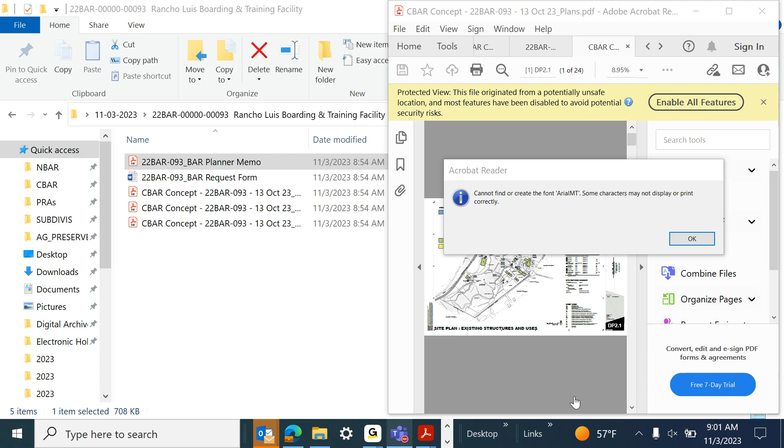People think we don't have a sense of humor. We're trying.

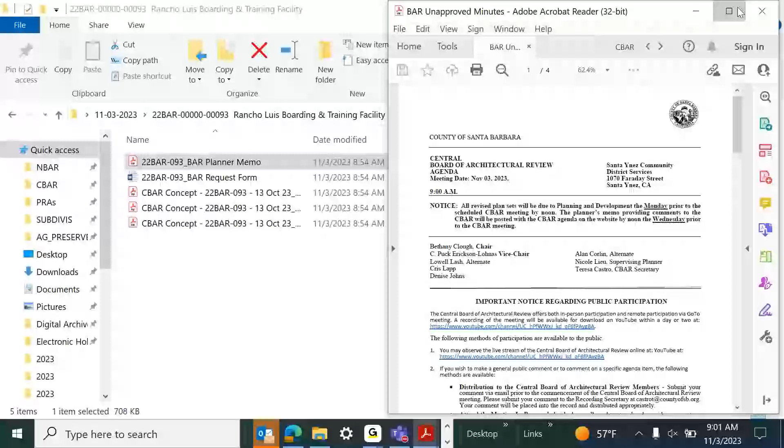Okay, I'm going to call the Central Board of Architectural Review November 3rd hearing to order. Are there any members of the public who wish to address the board regarding an item that is not on today's agenda?

We're not seeing anybody in the public. If you are online and wish to speak on this item, please raise your hand. Not seeing anybody raising their hand, we have no public comment.

Okay, agenda status report. We have no changes to the agenda.

Okay, I'd like a motion to approve the minutes. Second. Is there any further discussion? Does anybody have anything? No. Okay, all in favor? Aye. Abstaining. Okay.

CBAR informational briefings, anybody have anything? Did everybody get the memo from P&D about working on improvements to the process?

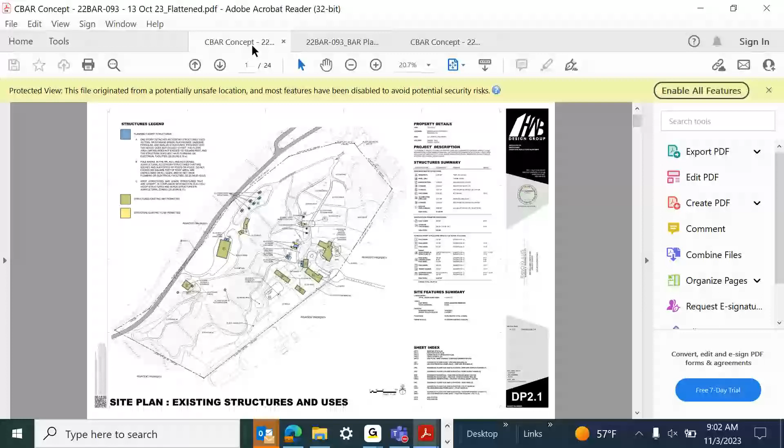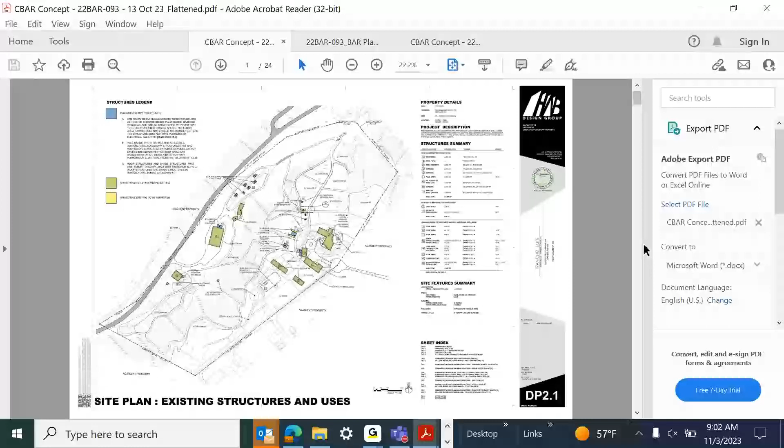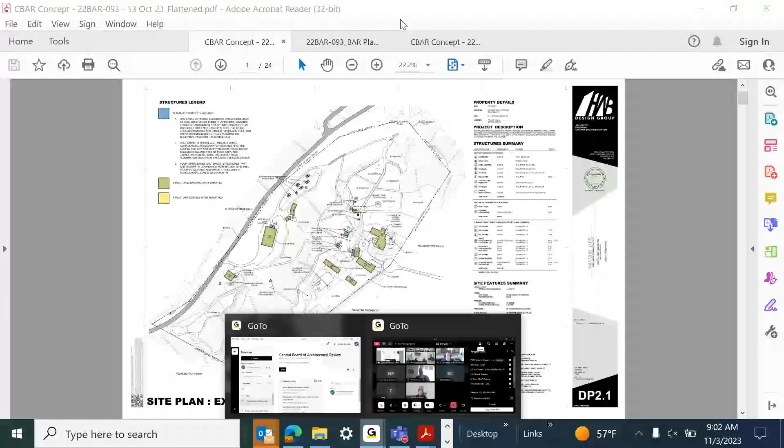Which process? The general planning process. No, I don't think I got that one. I think it would be forwarded to all of you, and it would be good to include input from CBAR members in terms of our perspective on what things might be streamlined or improved. What document did you get, or email? It was in response to the number of complaints lodged recently about how lengthy or difficult the permitting process has become.

Yeah, I didn't get it. I don't think I got it either. That's probably because I've been squeaky, but that's why I'm bringing it up, because it is very pertinent to all members. Whoever sent it to you, ask them to send it to all of us, and put it on the agenda if you want. Yeah, that'd be great. Anything else?

Okay, member recusals, do we have any for today? No.

Nicole, do you have a staff update? Yes, I have a few items for you, some of which I mentioned before. Coming up on November 7th, next week at the Board of Supervisors, they're going to be looking at some updates to accessory dwelling unit regulations in our ordinances, so that might be of interest. That's to bring it more into conformance with changes in state law.

And then on November 8th at the County Planning Commission, there'll be a housing element update. And then on November 29th at the Planning Commission, there'll be a hearing to hear the agricultural enterprise ordinance. And that's all I have.

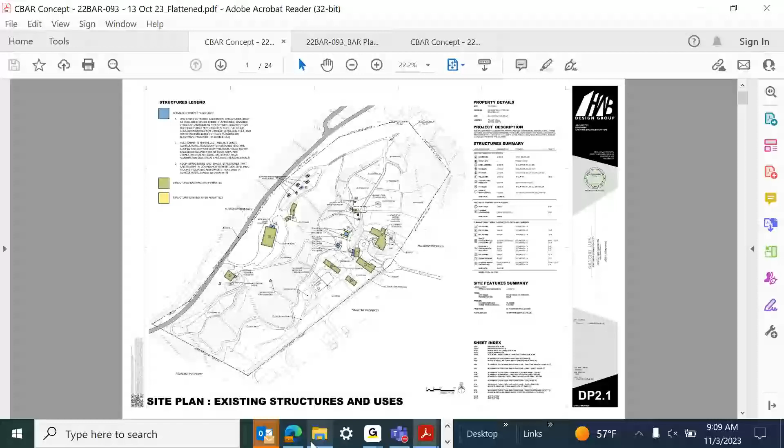First I'd like to pull up that response memo on the screen. I think it's the tab that has no name — yeah, there you go, planner memo, that one.

Hey, to interlude, this is Jax — this planner memo is different, just reflecting your response document. If you want to pull up the actual response document, Teresa, if you extend out the title text, it will say CBAR XYZ response at the very end. It's one of the PDFs. Yeah, there we go. There you go. Thanks, Jacqueline.

All right, so introduction here, like I talked about, and hopefully you guys had a chance to review this memo. I went item by item pointing through the plans, but I'll take you through this today.

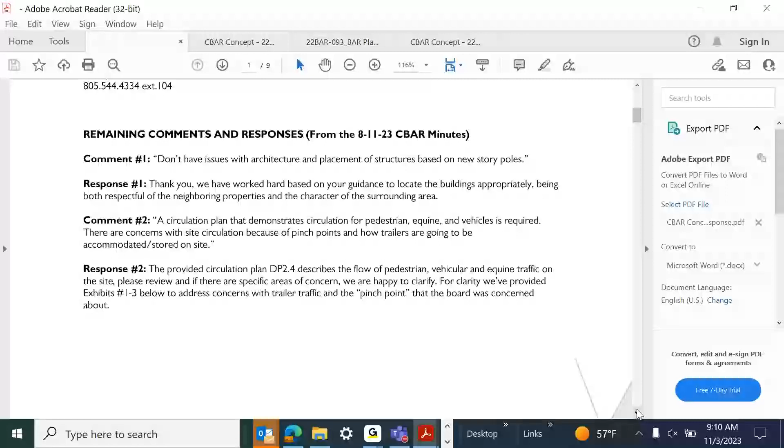If you scroll down to where you can see the first comment on the screen — there we go. Comment 1: not having an issue with architecture, placement of structures based on new story poles. Thank you guys for your effort collaborating with staff and the neighbors to make this project better through this process so far.

The second comment: circulation plan that demonstrates circulation for pedestrian, equine, and vehicles is required. It concerns the site circulation because of pinch points and how the trailers are going to be accommodated on site. So if you can now pull up the plans and go to DP 2.4. Once you've got that on screen.

Since our last meeting, we put effort into updating this plan to clarify how different types of circulation interact with the site, whether it's vehicles with trailers, the Kubota utility vehicles, horses, or boarders. If you're unfamiliar with the Kubota utility vehicle, imagine a 4-wheel-drive hardcore off-road golf cart — that's what we're looking at there.

Those are those guys. We've added a color coding overlay, so the hatch patterns in the cloud on the left side are color coded to show existing trails and paths suitable for riding horses or the utility vehicles. There are also existing vehicular roads on the site shown in the middle hatch color, and the proposed new driveway in darker gray on the south border of the site, extending down to the vineyard storage building at the southwest corner of the site.

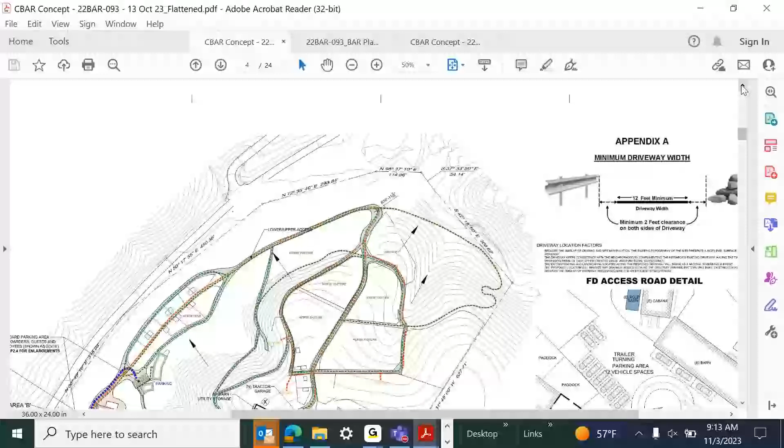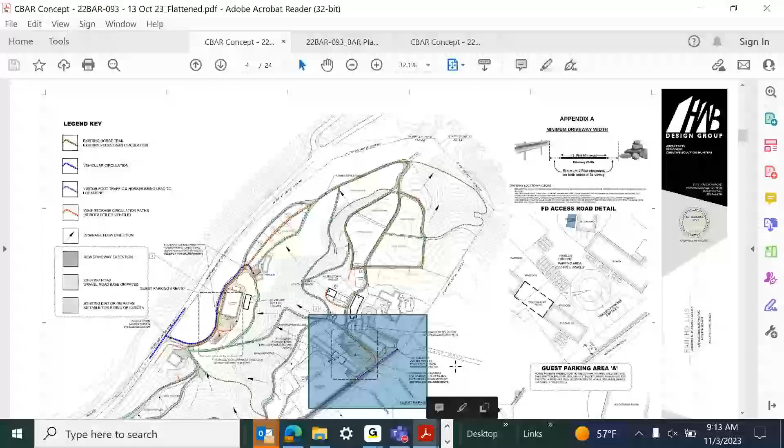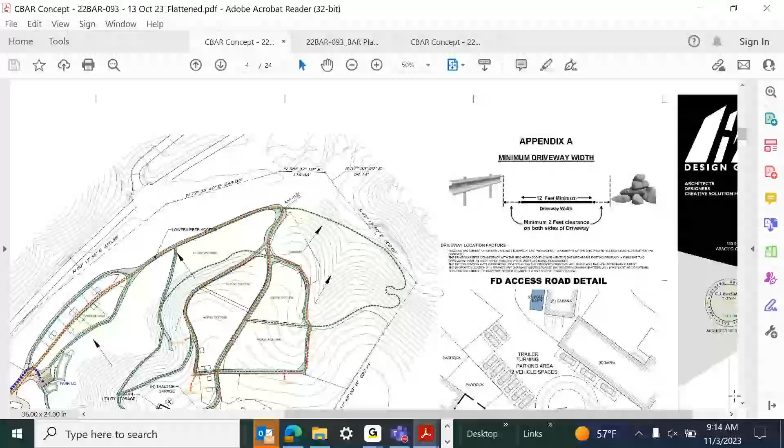In these 3 locations, starting with guest parking area A, keyed on the overall plan. It's the first entry point off the cul-de-sac on the southeast side. Let's zoom into that guest parking area A, the enlarged exhibit on the right side of the plan. There's B to the right, and A above and to the right - that one where your cursor is now.

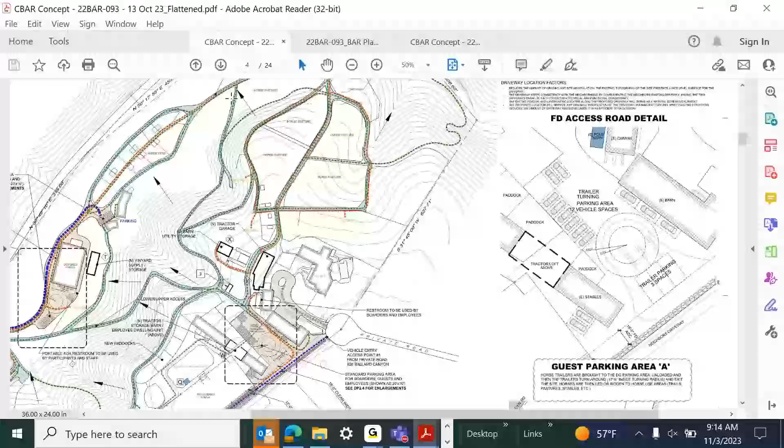So if you guys can see this clearly, I can explain. This is where boarding horses will park vehicles and trailers. They'll lead their horses by foot between the paddocks to the west, and under that tractor storage loft there's a walk-through beneath the loft over to the arena, down to pastures and trailheads to the southwest, or to the northwest there's also pastures and riding trails, up past the existing cabana.

We're showing clearly that a trailer can fully do a turnaround there without even doing a 3-point turn, which is nice - trailers can back in. We're anticipating up to 3 trailers parked in some spaces, positioned away from the property line past the proposed tree line, so those will be nicely screened from the neighbors. There's also standard vehicle parking for boarders to park their trucks. Past this point, trailers won't be circulating down the road on the site - this is where they'll stick to this area.

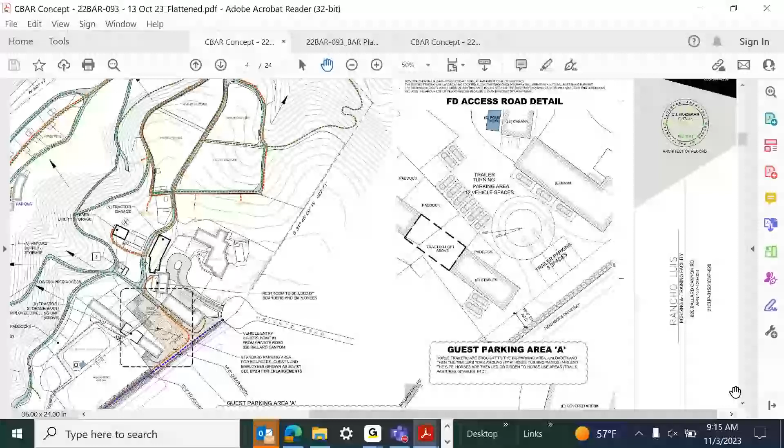Moving on to guest parking area B, just below this exhibit, on the lower part of the ranch by the existing covered arena, directly accessed off Ballard Canyon Road. We're also showing sufficient sizing for a trailer turning area. Horses here would be dropped off from their trailers at those locations and be either led or ridden to the northeast to the pastures, the existing covered arena, or trails on the site. There are vehicle parking spaces as well shown there, demonstrated with the functional geometry.

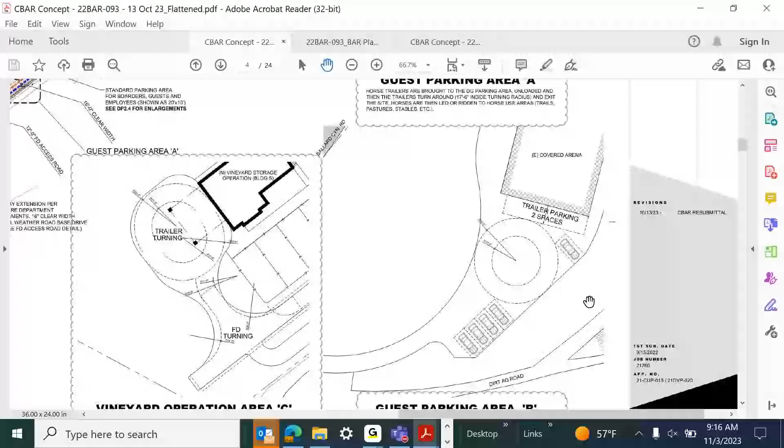Now on to Vineyard Operations Area C, the last exhibit. We put this here because there's a couple of functional areas we wanted to point out. We don't anticipate horses or trailers in this area because boarders will be dropping horses off at parking area A. We're showing functional geometry in case a wayward trailer ends up down here and needs to turn around - they can turn around and go under the overhang.

I'm getting a lot of feedback. Yeah, we understand what you're talking about, we've looked at these plans. If you could speed up, it'd be helpful. Well, I just want to make sure we're being thorough for y'all. Yep, appreciate it.

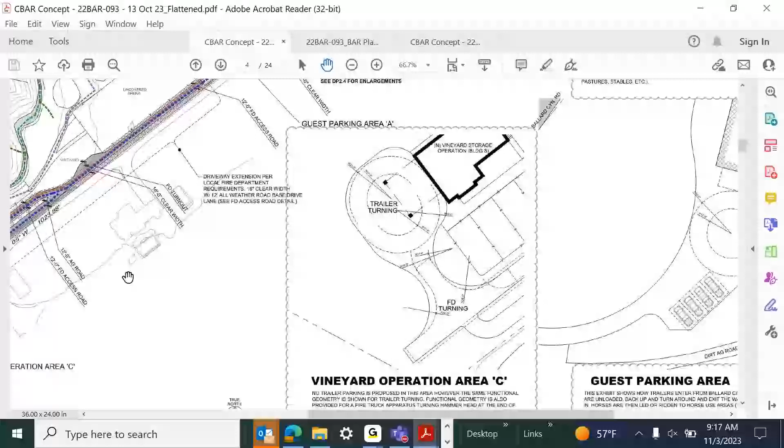So we don't anticipate horses or trailers down there because boarders will be dropping their horses off in guest area A. We've shown functional geometry in this location in case the trailer ends up here. The building will be served primarily by those Kubota utility vehicles, but you'll also notice in that enlarged plan there's functional geometry for the fire department turnaround, per county standards.

Again, I know there's a lot of information. Please hold questions so I can address those after public comment. I want to make sure we understand this exhibit.

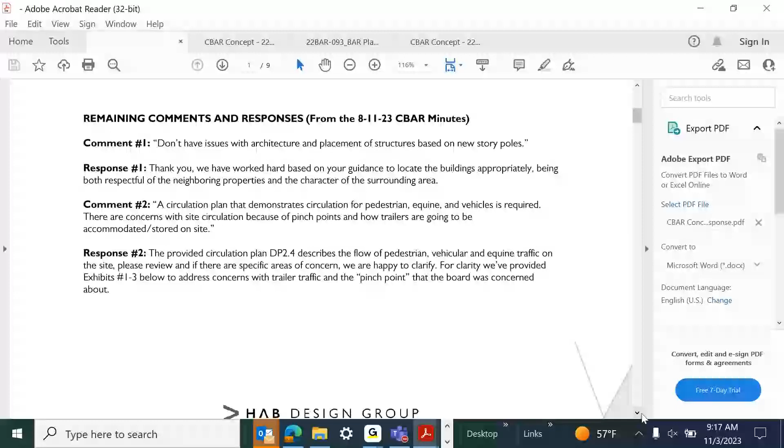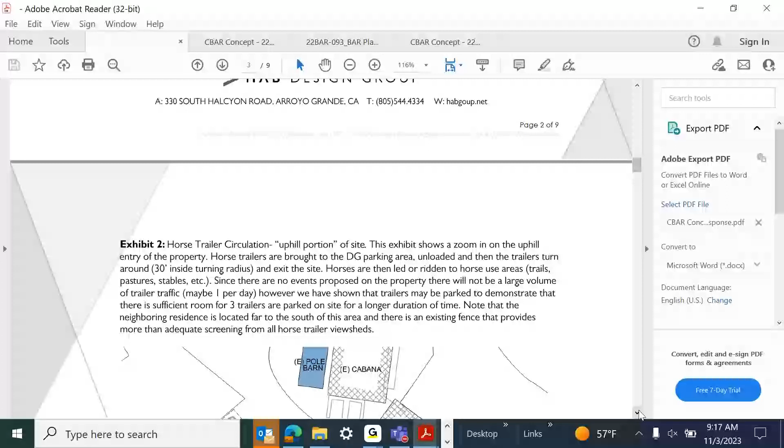Going back to comment 4, that comment covered comments 2 and 3, with 3 being functional geometry. Comment 4 is the documentation of existing grade and proposed grade - you can scroll by all this, but you wanted to see the function of the grades on all the buildings.

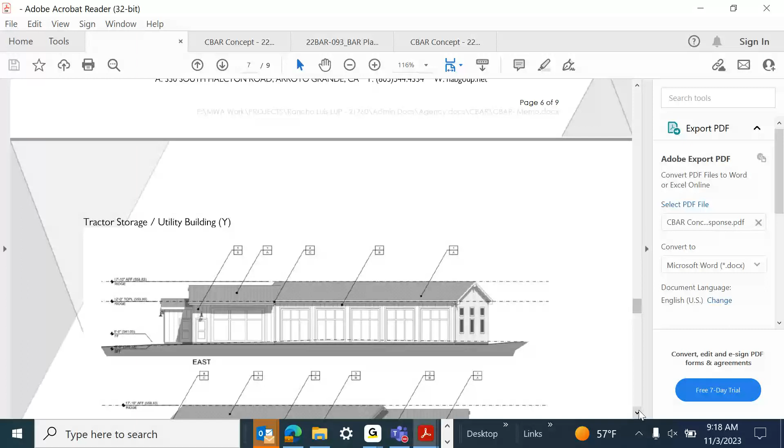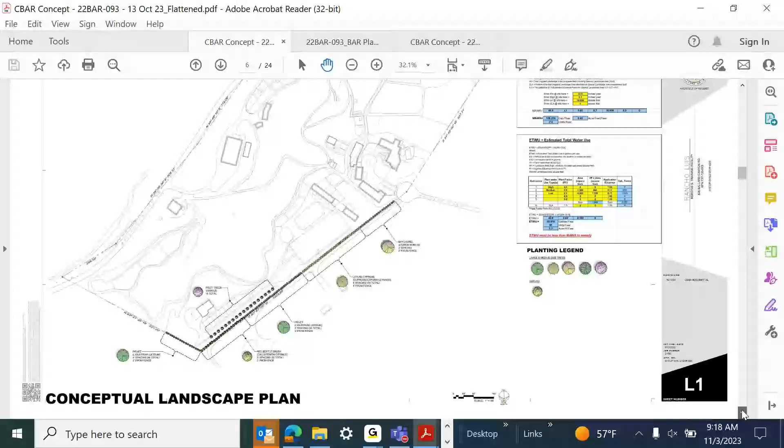So we can go back to the plans and show exactly how. I gave you snippets so you can see, but you start with DP3 in the plans. Whoever's controlling the screen, go back to the plans and go to DP3. See the dashed line there - that's the existing grade on all 4 elevations. Go to DP4, which is 2 clicks to the right.

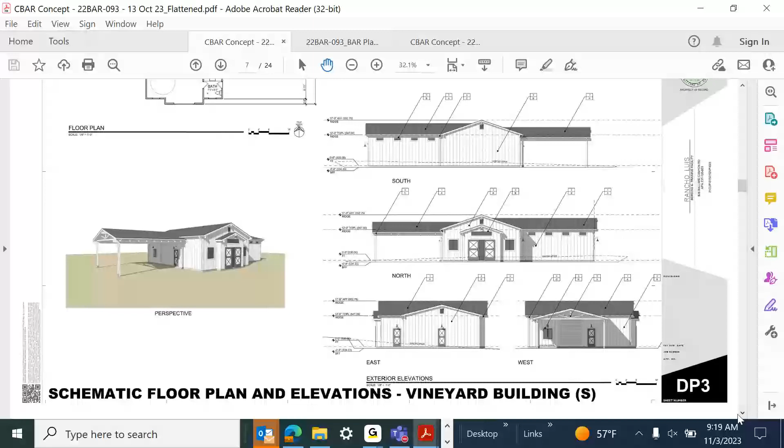You want me to go to D? Yeah, DP4, please. I'm just going through to show them that, keep going, DP4 there. Nope, that's DP3. Nope, that's 4.

Existing grade is shown on that plan. I wish we had the option to control this - that would be my feedback for these meetings. It's a lot to communicate verbally. So, yeah, I can just say with confidence we put the grades on these plans where they need to be.

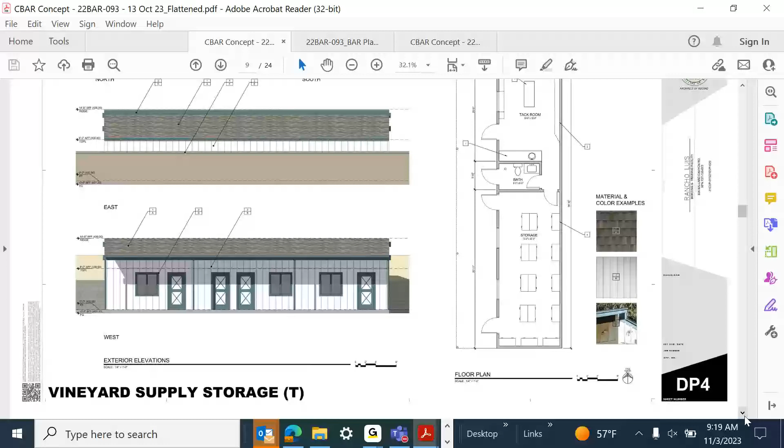There are 2 buildings on DP5 that are an interior conversion, so there's no grading proposed. If you're able to look at that one, I have a note that says no grading proposed, interior only. DP6.1 might be hard to see because existing grade area is flat. I do have an existing grade shown there on the north elevation.

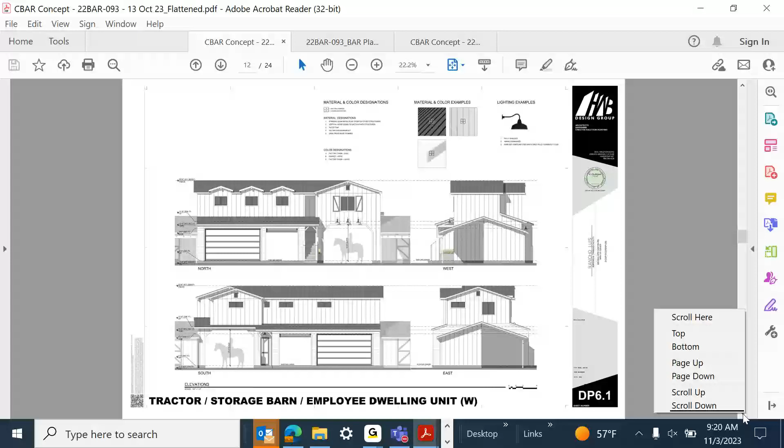And then DP7 is an existing structure, existing goat shed. So we're just substantiating that through this process. So there's no proposed grading. It's kind of sitting there as is.

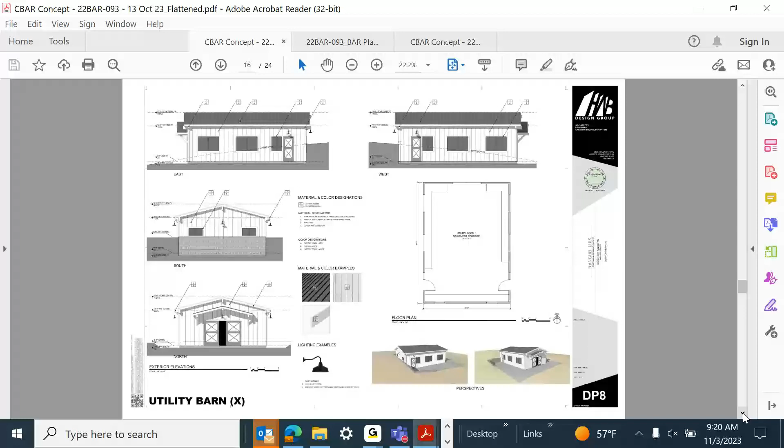DP8 and DP9 both are now showing the existing grades as well. So that's on to 8. I think some of these must have gotten out of order. There we go, so there's the existing grade line. And then DP9 as well - you can see the existing grade and proposed grade lines on the elevation.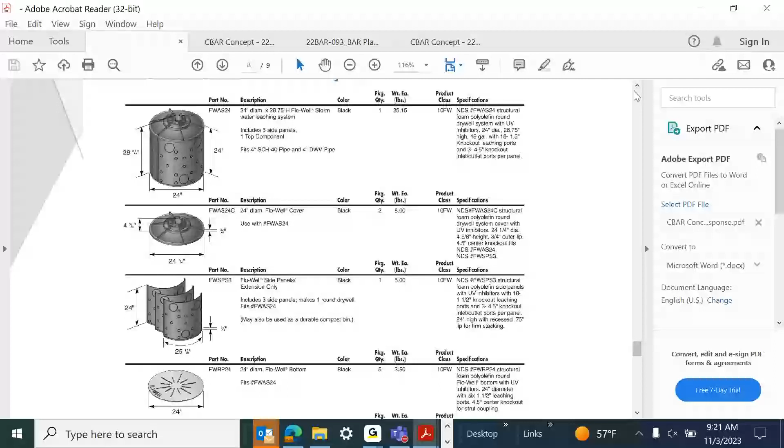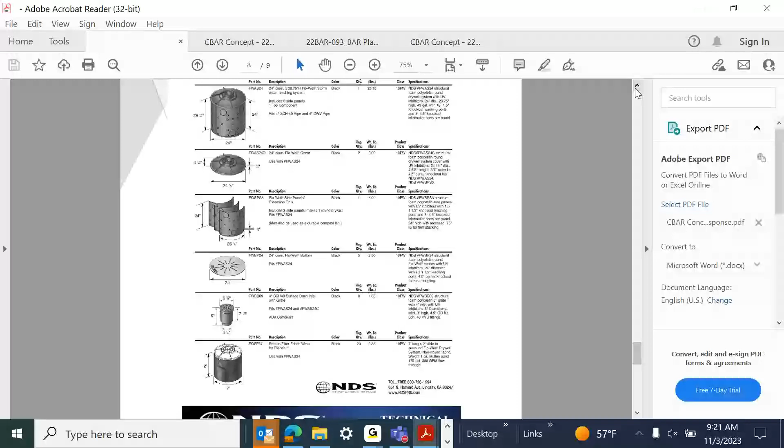While we're requesting that this be reviewed during conceptual review after engineering gets a chance to look at it, I can talk to this point a little bit, but it's going to depend on phase of construction. If within 3 years we build all these buildings, then we have to account for all the stormwater, and if it goes over 20,000 square feet of new impervious surfaces, then we're looking at using some underground chamber system like this Flo-Well system, and these can be stacked in various arrays.

They're completely underground. Given the property and the grading conditions, we have plenty of space. I wanted to show you these because they're 24-inch diameter units, and they would not have any appearance above ground at all. This would be piped - everything would run down into these chambers and be percolated into the site. So this will be something that we address with engineering and request the committee reviews at that time.

So that concludes my presentation. I don't know if you have any questions for me now, or should we wait until after public comment?

I'm going to ask right now, do we have any point of clarification? No, I think that was it singularly. Okay, do we have public comment?

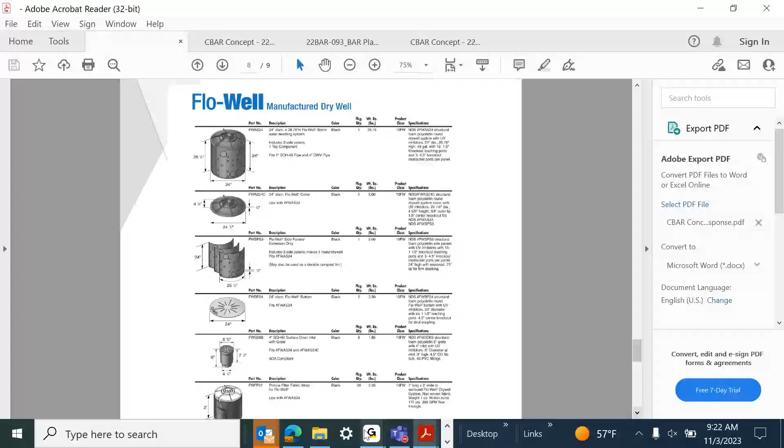If you are online and wish to speak on this item, please raise your hand. Not seeing anybody raising their hand online. And then we do not have anybody in the audience today. Yeah, we have no one here besides us. So no public comment. Okay, Jax, is there anything you need to add?

Nope, nothing that I need to add. CJ covered everything in his presentation, and staff has reviewed the plans and agrees with them to this point.

Okay, all right, who wants to start? Anybody want to go first? Yeah, I can see that. Do you want to start? Yeah.

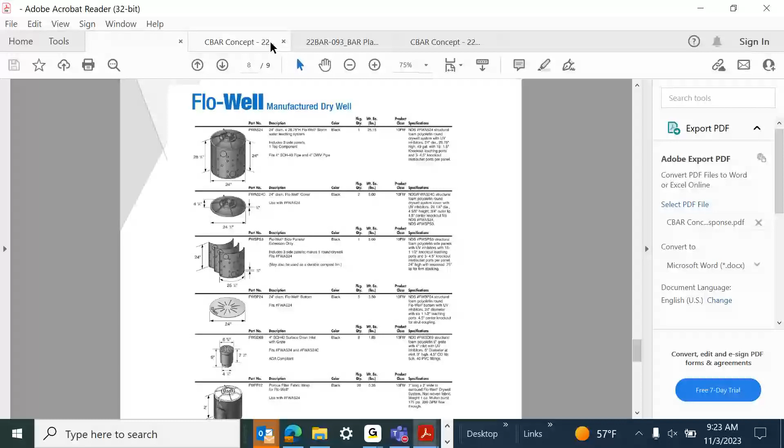I'll go back to the site plan, if you want me to. Yeah, go back to the site plan for me, scroll up. Thank you so much for providing - keep going - the circulation plan. It seems pretty complex, but given the nature of the site, I understand some of the legal issues and things. It seems like some of the things could be joined up, but this is an internal functional issue, so I don't have any problems with it.

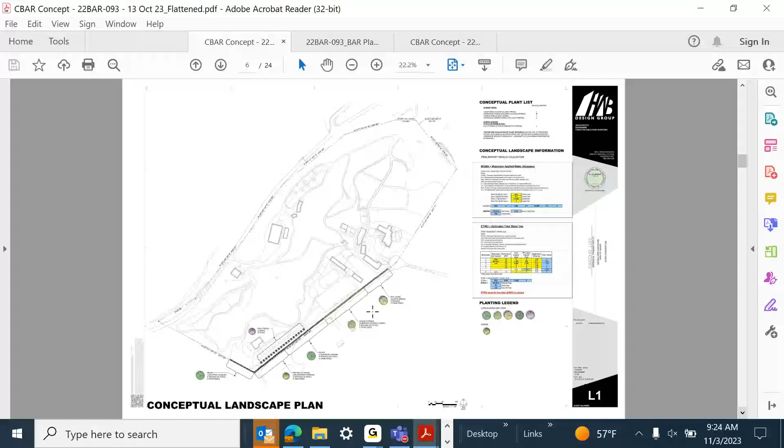Okay, could you go to the landscape? Because I don't think we talked about landscape. Whoa, there it is, that's the well. This one? Yeah, can you zoom in on that yellow and blue in the chart?

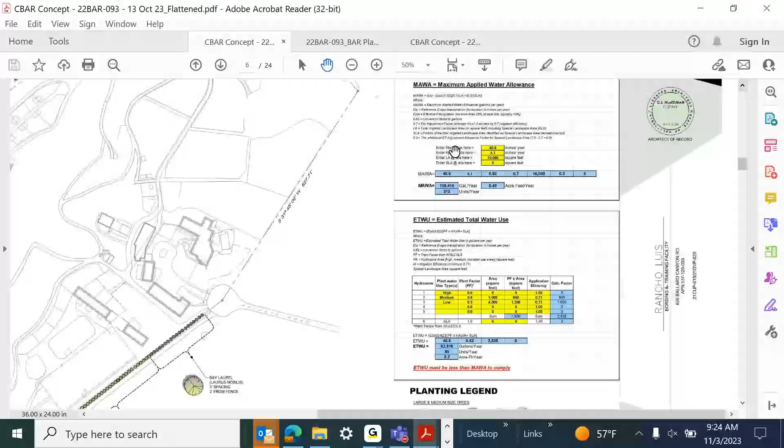Jax, this is more for you, but it's also for the applicant. That square footage in the top, yep, that 10,000 has to match the bottom. You don't get to double it. And there's some other issues in there you're probably going to want to look at. Okay, thank you - they need to use the format that is provided.

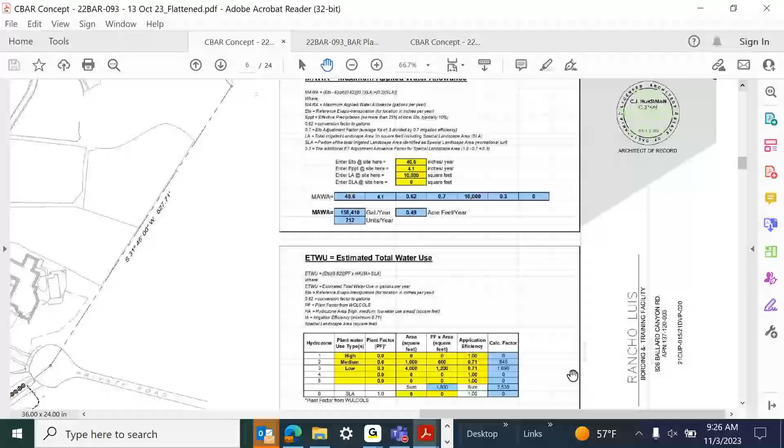Just real quick, can you go back to that detailed circulation plan again? Please. Which one? Area B, and area A and B, I guess.

Area A, so when you come back, what I'm looking at is a giant expanse of open space. Whatever your landscaping will be in this area will really help, and the materials you'll be using in that space for dust and heat will be really useful in understanding the function of this space. Also Area B, because I don't see any planting in these areas to mitigate for heat and dust. So that is my concern for both of those, actually all, the vineyard area, Area B as well.

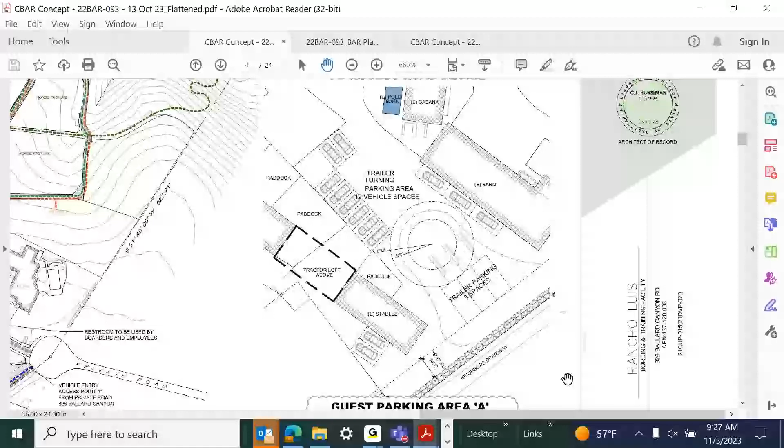Okay, anybody else have a comment about that? Denise, what I see is they've got that hedge along the property line, and given the way vehicles are going to be coming in and out of there, I'm okay with it the way it is. I just wanted to state that. I understand what you're talking about, but it's okay for me. Does anybody else have a different opinion?

Well, I just want to support what Denise is saying in terms of, when you have employees that are taking their breaks or lunch, everybody tends to gather under a tree. So I think it's important to have some spots of shade where workers can gather when they need to.

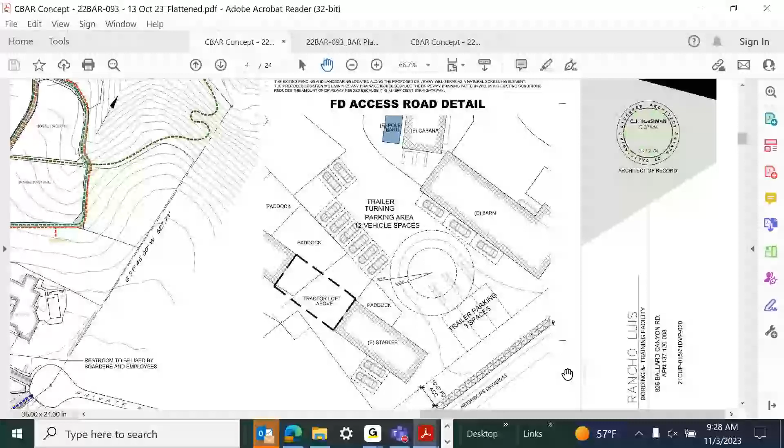If I can jump in there, we just have a layer. I've got to get my comments. Hold on just a second. Okay, sorry, and then could you, just again, the overall site plan, I just wanted to look at that.

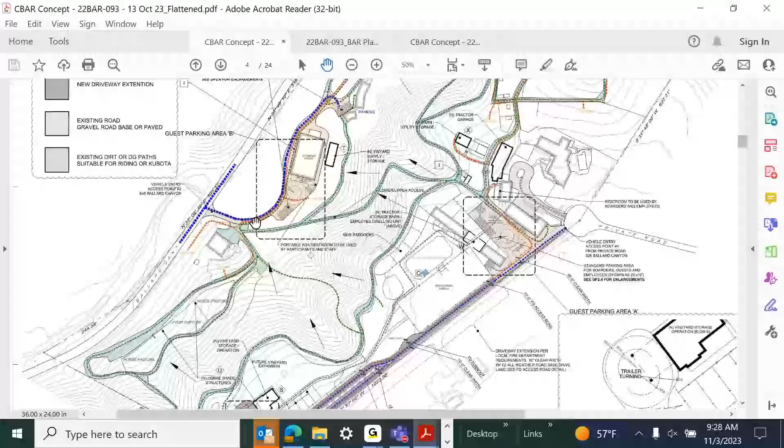I guess this is a question, I apologize. That blue dotted access road on the south there, that main straightaway. Just looking at that, it's really made for speed, and it would be beneficial if there was some way, it seems really close to the property line, and if there's some way to do some traffic calming, maybe if you can meander that roadway just a little bit to slow travel down a little bit.

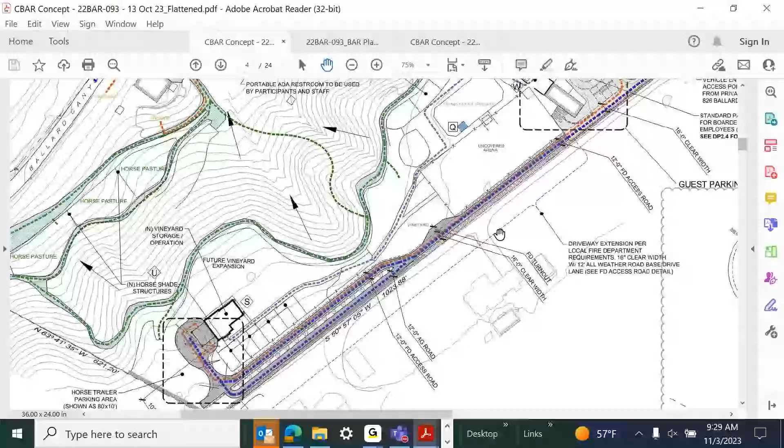Well, there's an uncovered arena right there, so that's not much wiggle room, but down here, where they've got the divider with the fruit trees in it. So go back up where you're saying there's no room in the uncovered arena. I didn't say there was no room. I said there's an uncovered arena right there, between it and the property line.

But that's the other person's property, right, though? The southeast of that. Right, it's that, so I'm just looking at that. I know there's an uncovered arena there, and it just appears to me that it's made for a really quick exit. So if there's anything we could do to slow traffic down, that would be a comment.

Well, what I'm trying to get from you, Denise, is what specifically do you want them to do with the constraints? In that vineyard, looking at the grade there, is there a way to have the access road meander a little bit? Is there any place to meander the road? I guess is my question.

Applicant, is that CJ? Yeah, I mean, I can address that a little bit. We're running up against our uncovered arena to the northwest there, property line, fence, and planting area to give the neighbors some screening from these operations to the southeast. Our fire department has specific access requirements, and we're trying to hold to those. So we do have a more narrow road, this isn't a raceway. There's not going to be a lot of public access past parking area A. Most of that roadway is used just to serve the vineyard operations, which is a private, small on-site vineyard operation. So most of that dashed blue is actually going to be the orange dash, which is going to be those utility vehicles traveling down there.

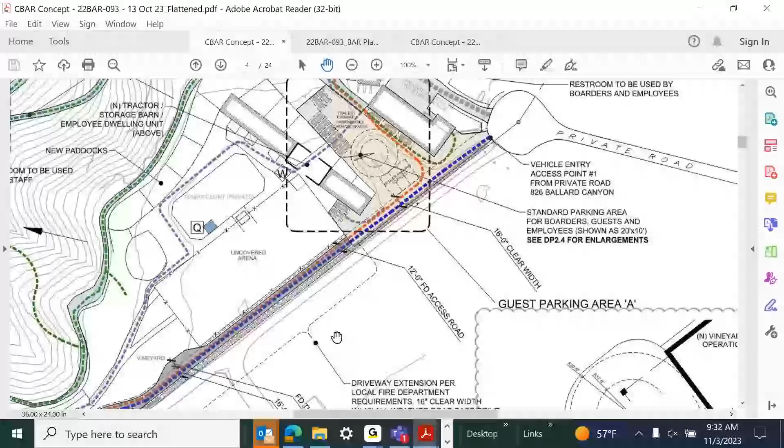Folks that are paying to board their horses on site aren't going past that first area and zipping down there. It seems like there's just a lot of expanse of unshaded area. Even just trees adjacent to that roadway would probably help slow it down and cool it off a little bit. Yeah, there's an entire tree line to the south of that roadway, if you look at the landscape plan.

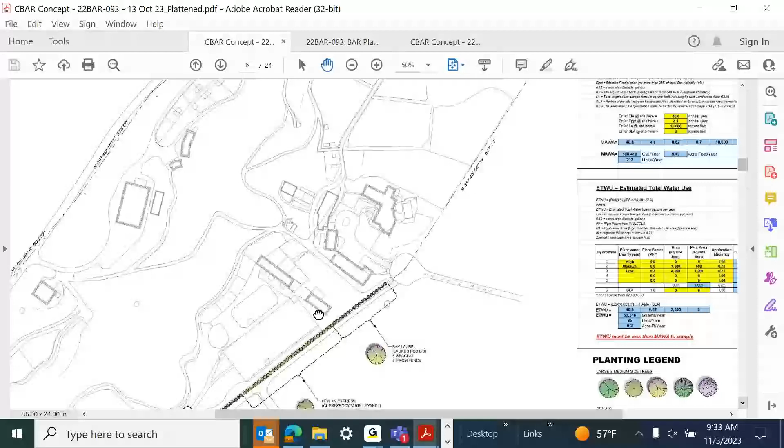And then there's more trees, fruit trees, as you go further south towards the ops building. There you go, zoom in please. This is what they've got for planting—see, it goes all the way along. And then there's that row in kind of that little divider, the boulevard piece.

Yeah, I see that, it's just not offering a lot of shade. I understand, it's very... so that would be my comment. If there's some way to add some shade, and to control dust, and slow down traffic.

Alan? I don't disagree with what Denise is saying, although I don't think what they have there now is a problem, but I humbly suggest that the President, you, Bethany, when one of us brings up something like this, we poll the board to see if it really is something that we want the board to have them do, or just an individual member's comment.

No matter who's—at that's where I'm getting to, that's what I'm trying to do, because the next step, where I'm at, is this plan is at a place where I would be contemplating preliminary. For me, preliminary means we're pretty well locked in, we've solved the major moves, there's not a lot of things that are going to impact or cause huge changes in the design.

So what I want to know from the rest of the board is, Denise has said she wants them to prepare—I'm not putting words in your mouth—make sure you want to see more areas, you want them to maximize more than they've done here, so it isn't a straight shot, although it comes down and does wiggle a little, but not much, and there's a fire truck turnaround required at the end of the arena.

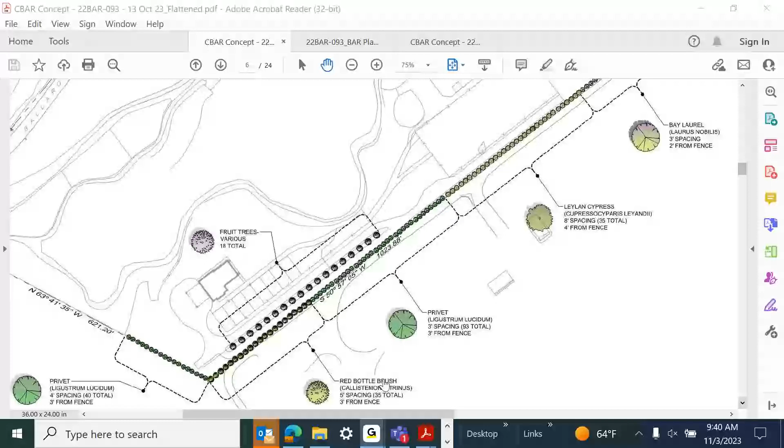Okay, so comments on the board are what I think, so these are just what you, while you're still kind of coming to conclusion, which I think was to provide shade trees. But if you want, okay, so that should, Denise, jump in after I do this, okay? But I think what I said right before we ended was: provide shade trees adjacent to structures, new structures that do not currently have any. Does that sum it up?

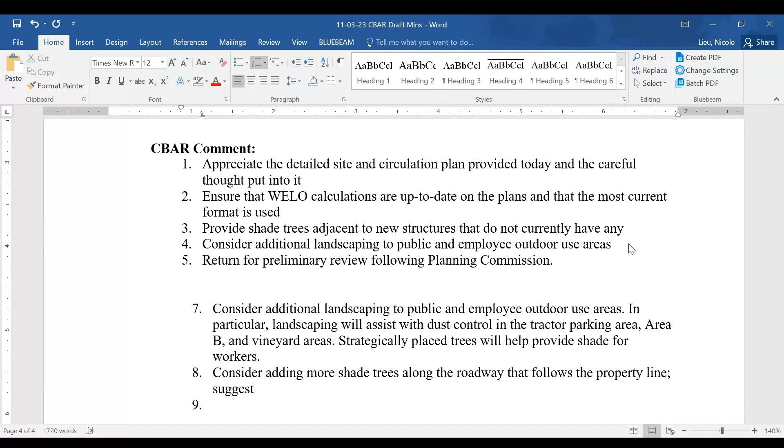This is testing. It's a function of, there's several things, but that's kind of what happened on ranch. We got working ranch, so.

Okay, now, did I capture everything? Yeah.

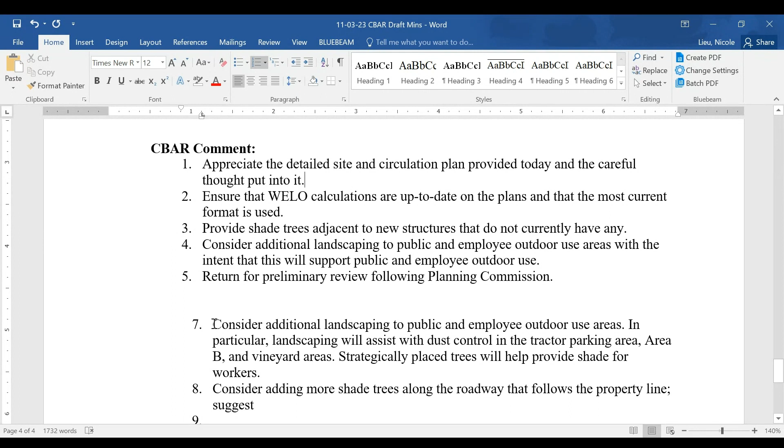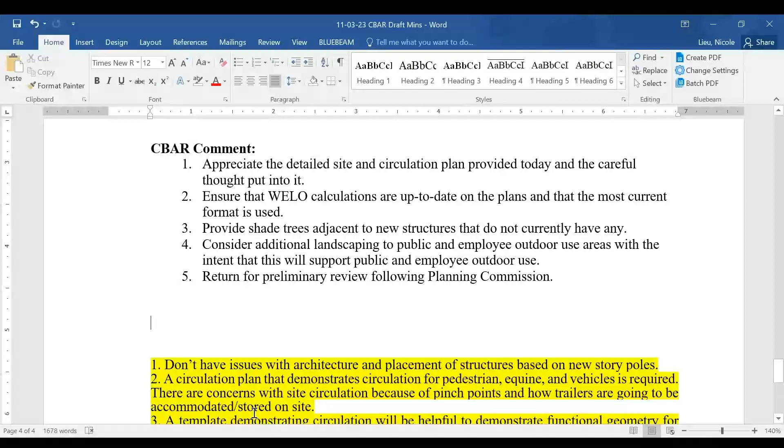7, 8, and 9 are not part of what we're going to have, right? Anyways, yeah, so you guys cannot rehash it, we're just doing what I said. We don't get to retalk it. Yes, exactly. Darn it. Sorry, yeah, you talk.

Good with that? Yeah, I just want to make sure that this reflects it.